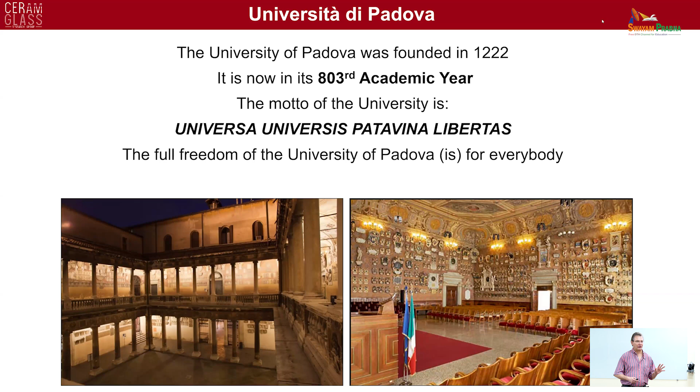If you're interested in history, I can explain further. This is related to the fact that the Venetian Republic was not under the Pope, and therefore it had freedom of research and teaching, which other places didn't have in Italy for a long time.

Galileo was a professor in Padua for 17 years, and actually Sidereus Nuncius, the book he published describing Jupiter's moons, was written in Padua based on the observations he had there.

If you come and visit the university, we still have the chair that was built for him by his students, so that they could see him because he wasn't a very tall guy. The University of Padua is famous for the medical school because the anatomy field started in Padua.

We have a long list of important alumni. If you're a mechanical engineer, you certainly are familiar with cardanic joints. Cardanus was a professor of mathematics at the University of Padua. The list also includes Giacomo Casanova, who graduated in law from the University of Padua.

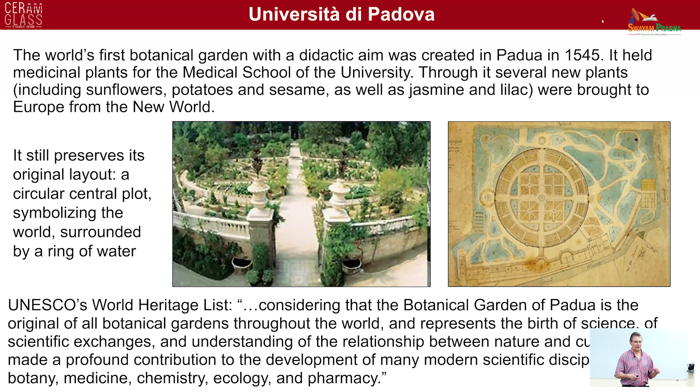We also have the world's first botanical garden, created to teach medicine, or actually medicinal plants, to students, and it is still in the original place. A lot of plants from the New World were introduced into the Western world through the botanical garden in Padua.

We also have the first female laureate in the world. She was a Venetian noble who graduated at the end of the 17th century. After graduation, she was sent to a convent for the rest of her life, but at least she was a doctor, and she kept studying and working.

The university is pretty large. We have about 75,000 students, of which about 13,000 are engineering students. The data are a little bit old, but we don't have a bad ranking in the different listings. My department deals with the fields of aerospace, chemical, electric, energy, mechanical, and materials engineering.

We have, of course, courses at the bachelor's, master's, and PhD level. Currently we have about 150 faculty, about 190 PhD students, and more than 200 postdocs.

So we are very interested in, as I mentioned, student exchange and collaboration between different institutions.

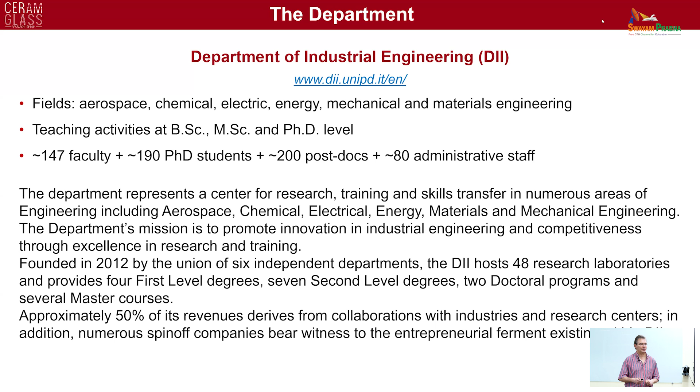Personally, I work mainly on additive manufacturing of ceramics, especially from precursors. I have been working for a long time on polymer-derived ceramics, and I'm working also on geopolymers now. A colleague of mine is working on biomaterials, and we are also interested in materials for the environment.

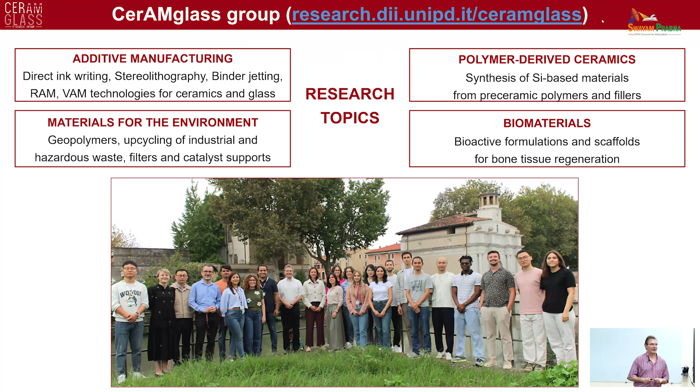This is my group with a couple of colleagues, and some funding agencies from institutions and companies. So I think I can move to the lecture.

In this cycle of classes, I will be discussing additive manufacturing of ceramics. I don't know what kind of background you have in additive manufacturing. The first lecture has the aim of telling you why and when it would make sense, in my opinion, to use additive manufacturing.

The main message is that you do not necessarily need to use additive manufacturing if that's not favorable in terms of cost, speed of process, or geometry of the component. So I don't want to put you off the topic, but I'm simply trying to encourage people to use additive manufacturing where it could have the most impact.

So this first talk is quite general. I will be talking about why it would make sense and when it makes sense to use additive manufacturing, specifically for ceramics.

You're certainly familiar with the fact that you have three basic principles for the shaping of materials. You have formative shaping, which is applied a lot to metals and polymers, but can be applied also to ceramics. Subtractive shaping is also a very good way of transforming a part into a component with specific shapes.

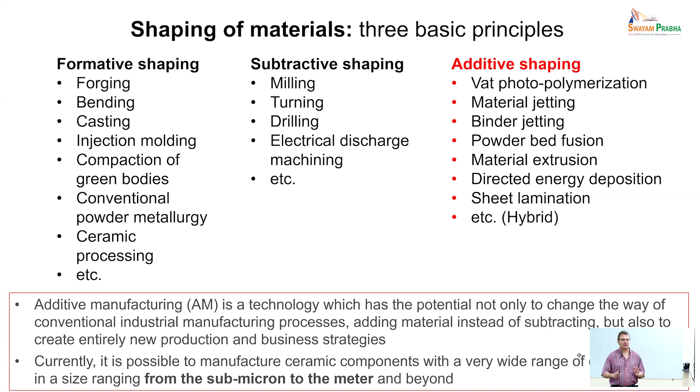Currently it is possible to generate ceramic parts with a wide range of compositions, starting with sizes from a few hundreds of nanometers to the meter and beyond. Of course, there are still a lot of limitations in terms of compositions, precision, and all these things that are related to the specific technologies that people are using.

One point I would like to make is that at the beginning, people were referring to additive manufacturing as rapid prototyping. This shows that the idea behind it was not that of producing components for use or testing, but it was rather simply a rapid way of shaping specific parts and showing the potential that they would have starting from the shape.

These days, there's been the transition from rapid prototyping to actual additive manufacturing, where you use this type of technology for making parts that you can use.

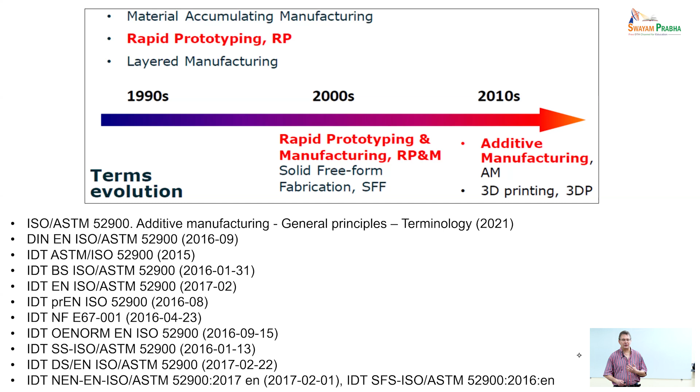They are called binder jetting, material extrusion, directed energy deposition, material jetting, powder bed fusion, sheet lamination, and vat photopolymerization. They each use different approaches. They have limitations and characteristics, and I will try to discuss some of them specifically in relation to ceramic materials.

Let me just mention that these technologies are not enough. People are still trying to develop new approaches, and one possibility is to use what is called hybrid additive manufacturing. So you combine different technologies because, as I will hope to demonstrate, each technology has strengths but also drawbacks. By combining different technologies, people hope to overcome some of the limitations that come with each specific technology.

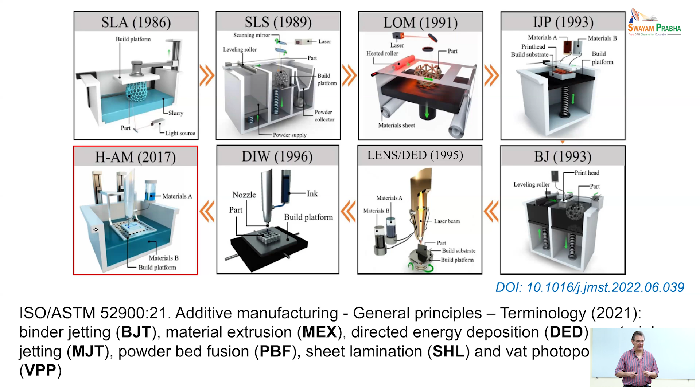So that would be the holy grail for ceramic additive manufacturing, if you can do that. But those technologies have a lot of problems, and the parts you can generate do not yet possess the properties required for application. So people mainly use technologies where you shape the component and then transform it into a consolidated, sintered bulk ceramic part.

This is a bit trivial because you're certainly familiar with the fact that additive manufacturing is basically creating objects layer by layer, and what you need to do is inscribe the layer and consolidate the material specifically where you want it in space on your XY plane. This leads to certain surface features that can be detrimental or not, depending on the application.

For ceramics, remember that surface flaws are a killer for mechanical properties. So ideally, for ceramic manufacturing, you would like a smooth surface. But there are applications, for instance catalyst support or areas where you want to increase the geometric surface area of your part, where having surface features might be useful.

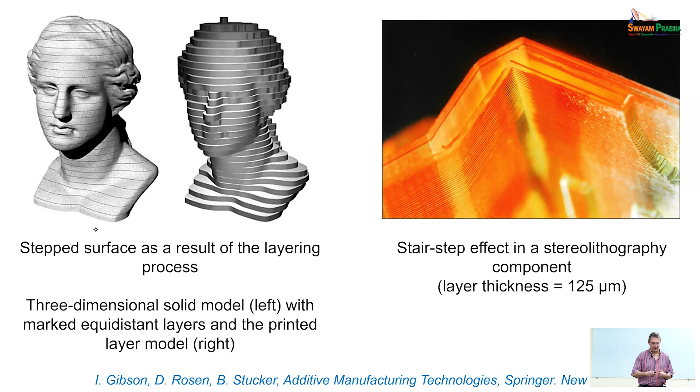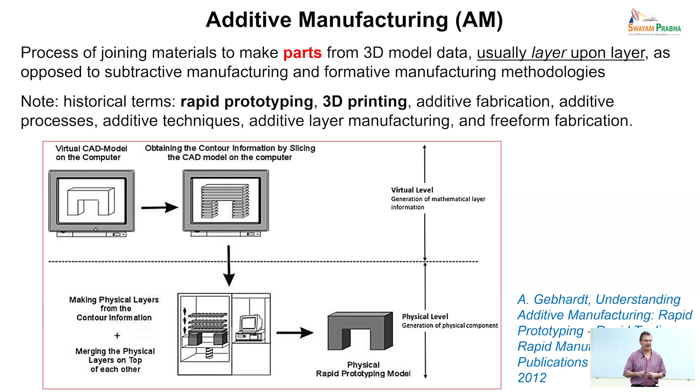Let me mention that what is true for this type of additive manufacturing is actually not true for a new type called volumetric additive manufacturing, or VAM. VAM builds a part within the volume of a liquid, and therefore the part is not built using a layer-by-layer strategy. This leads, for instance, to smooth surfaces, which is quite nice to have.

So there are quite a list of advantages for additive manufacturing technologies, you can see them there. You don't need tools and molds, which are expensive, especially for ceramics because they are hard materials. You have a fast time from design to product, and for small series production they're cost efficient. You can make a wide range of highly customized products. And we shouldn't forget that with additive manufacturing, you can obtain geometries that would not only be difficult and expensive to generate using conventional manufacturing, but components you would not be able to manufacture using traditional approaches at all.

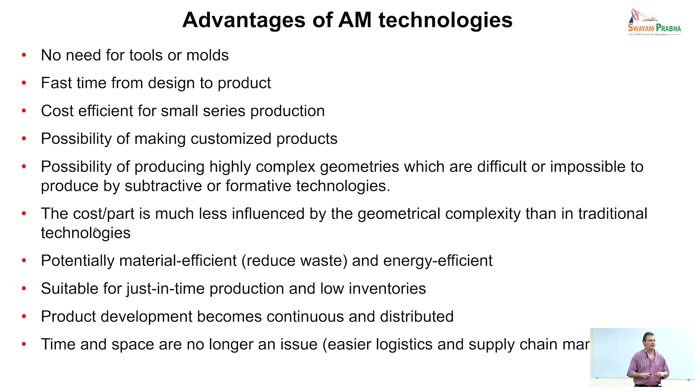Also, another significant advantage is that the cost per part is not influenced so much by the complexity of the geometry, and that's certainly a strong advantage with respect to traditional technologies. You can see other advantages there.

These are classical images you can find, there's a reference there, that show for traditional manufacturing you typically have a decrease of cost per part with increasing the number of parts manufactured. This is related to the fact that tooling is expensive. It means that with additive manufacturing, you don't have this economy of scale effect, which makes it possible to generate a limited number of parts, but highly bespoke, highly architected for specific applications or customers. This shows the strength of additive manufacturing, because you get the possibility of individualization for free.

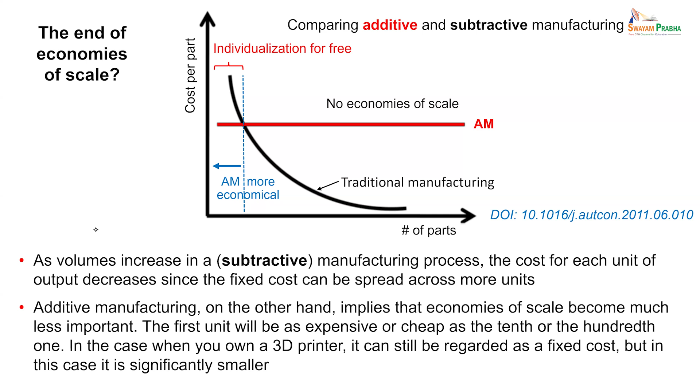Another chart people show is that cost per part with traditional manufacturing increases rather steeply with increasing customization, complexity, and the number of variations needed in the part. While with additive manufacturing, printing a simple design or a more complex design is not an issue. So above a certain threshold, additive manufacturing provides a strong advantage, because you obtain complexity for free.

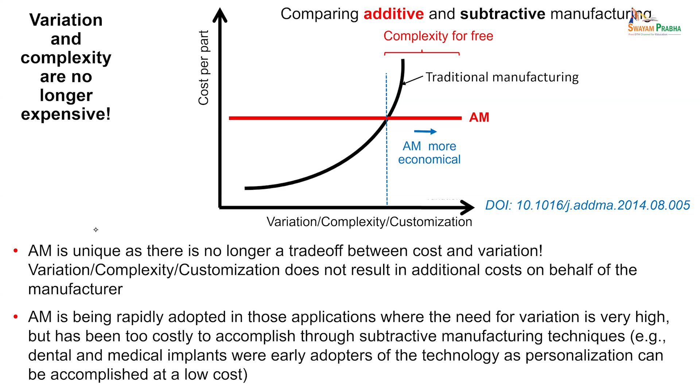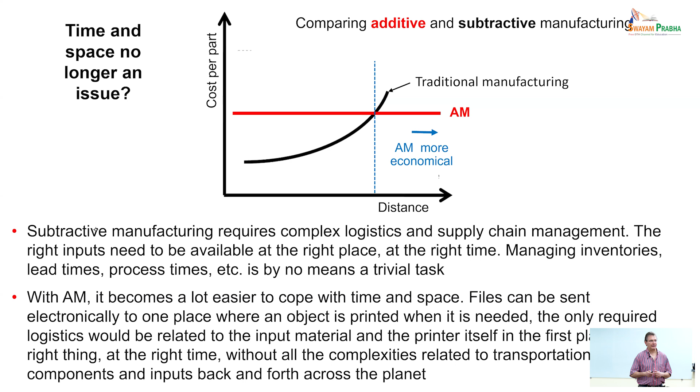Another point I'd like to make is about the cost per part with respect to the distance from the manufacturing site to where the part is used. With traditional manufacturing, cost increases with distance because of shipping. But with additive manufacturing, you could distribute the designs to different localized factories. This way, additive manufacturing becomes more economical when you have to send parts far away from a single specialized factory.

I will not talk a lot about applications of additively manufactured ceramics. I will be talking more about shaping, about fabrication rather than applications. But I just want to give you a couple of examples that show the advantages of additive manufacturing.

This is a catalyst carrier designed by Fraunhofer IKTS in Germany in collaboration with Lithoz, an additive manufacturing provider of printers in Austria. You can see that by computation, and now with artificial intelligence, you can drive the design of the part towards using the architecture of the part as a way of controlling and optimizing its properties. In this heat exchanger, there's a completely new design compared to traditional catalyst carriers, with improved efficiency because you have in situ turbulent flow, shorter reaction path, faster reaction time, and higher conversion.

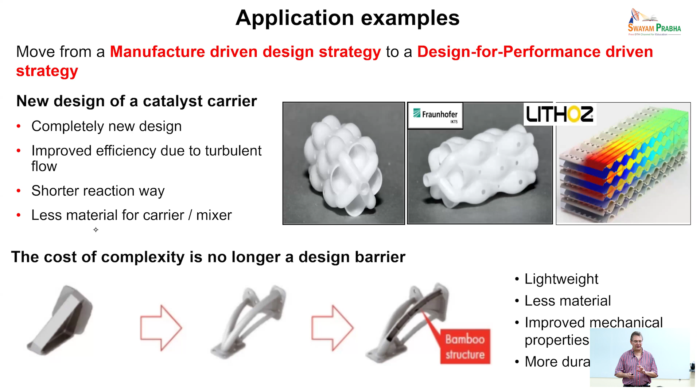You can see another example showing that the cost of complexity when using additive manufacturing is no longer a design barrier. You can see going from a traditional component to a more optimized component where you have less material, better mechanical properties, and a more lightweight part. There is tremendous effort going on in the field of additive manufacturing for topological optimization—computational modeling and optimization of shapes for specific applications.

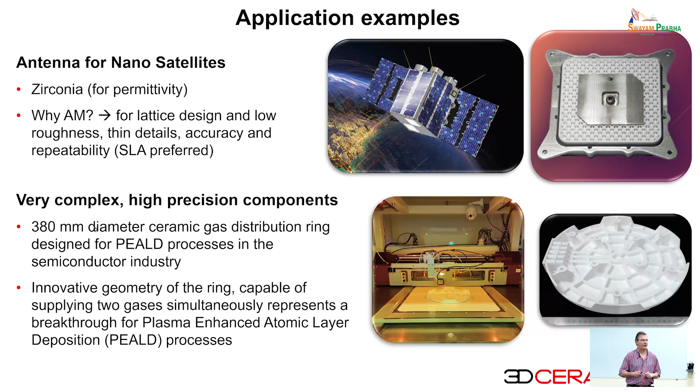So I'm certainly an advocate for additive manufacturing, in particular for ceramics, but we need to be aware that there are also disadvantages. As a student, you tend to follow trends because they're exciting, they're novel, and you want to make an impact. But at the same time, you need to be aware that not everything is paved in gold.

The disadvantages of additive manufacturing technologies are, for instance, that printers are expensive. Of course, you can have cheap printers, but then you get cheap parts, or cheap looking and behaving parts. From the industrial point of view rather than research point of view, the technology does not provide an easy means for scalable production because there are limitations to the technology. If you want to make a lot of parts, you need to use a lot of printers—you cannot simply increase the size of the vat, for instance.

So you need to operate in series. There are also certain limitations in terms of the size of parts you can make using additive manufacturing. The production rate per machine is limited by a range of factors, and also the type of material itself poses some issues in terms of what you can do using a specific technology.

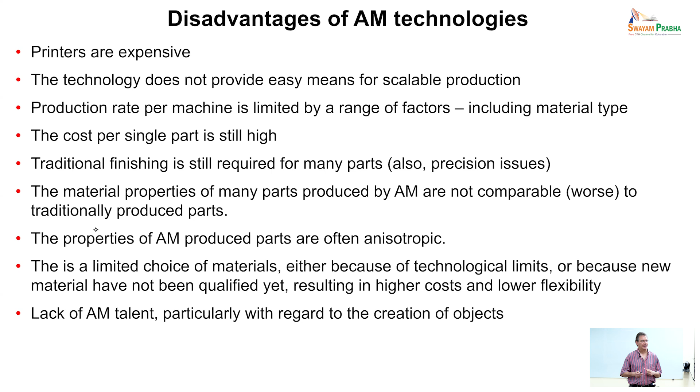Additive manufacturing is not taught a lot at universities yet. Certainly it is from the computational point of view, but from the manufacturing point of view, it's less so.

I already mentioned that you have 7 different categories for additive manufacturing. People working in additive manufacturing in general would call direct additive manufacturing a technology that gives you not just a shape, but a material that is ready to use, already consolidated. They would call indirect additive manufacturing all the technologies that require further thermal processing to obtain your final part. So from that point of view, almost all technologies used for additive manufacturing of ceramics are indirect additive manufacturing technologies.

But we can use the same terminology with a different meaning applied specifically to additive manufacturing of ceramics. We can say that direct additive manufacturing is an approach where you deposit the material only in the position that gives you the desired shape for the final object. These include direct ink writing, inkjet printing, or fused deposition modeling.

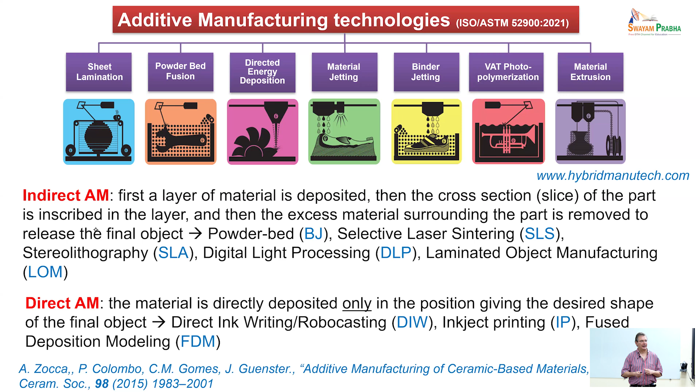While indirect additive manufacturing is an approach where you deposit a layer of your material, you inscribe a shape of that layer using different approaches, and then you remove the excess powder. This means, for instance, that you cannot make an enclosed space or enclosed cell, because you would not be able to extract the unbound powder from that area. These technologies include binder jetting, selective laser sintering, stereolithography, DLP, and laminated object manufacturing.

I'm not going into the details for each technology because there are certainly books available and a lot of sources for you. But I would just want to quickly present the different technologies and highlight some of their working principles and issues that you might have specifically with ceramic material when using these for ceramic materials.

So VAT photopolymerization technologies - here I'm not listing all of them, but you have SLA, which is let's say the original one. You use a laser to consolidate your material layer by layer, and the laser typically comes from the top, and you generate the part, then you lower the part, the liquid fills the space that you've left, and you inscribe your layer again, and so forth.

Another approach is to do the same - you're basically cross-linking layer by layer using a photopolymer, and you lift or lower your body by the thickness that you want for generating the layer. Then you irradiate using a different approach that is based on mirrors and a different source for the light.

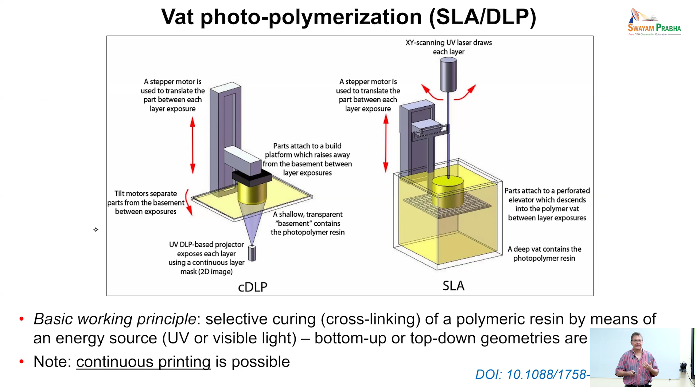This means that every time you shift the layer, you shift the part, and the gap needs to be filled by your feedstock. If the feedstock does not flow because it contains a lot of particles, then you have issues in terms of the homogeneity of that next layer you're generating.

So of course, what you could do is reduce the number of ceramic particles in your feedstock. But this means your part will have a lot of polymeric binder that needs to be decomposed. This leads to issues in terms of gas release, cracking, and also shrinkage, because the less solid ceramic particles you have in your system, the higher the shrinkage of the part, with issues in shape stability, and also it's an issue of cost.

So people use highly loaded suspensions, meaning more than 40 volumetric percent. In terms of weight percent, you can go up to 80 weight percent ceramic particle loading into your feedstock.

When you have such highly non-flowable slurries, you need specific printers that spread the layer using a mechanical blade, like a doctor's blade. This is the best approach for generating a continuous, homogeneous, flat layer of new feedstock that then needs to be photo-cross-linked.

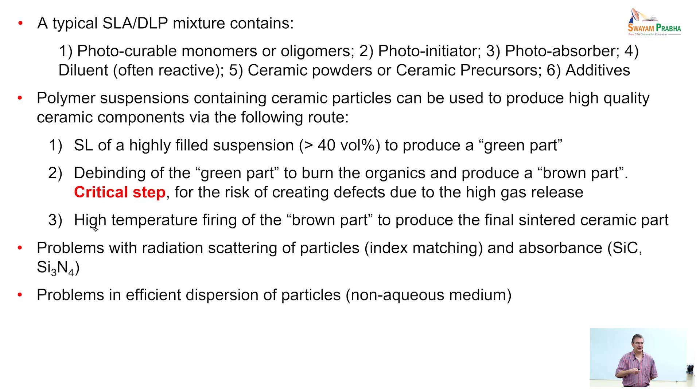Having a homogeneous and stable slurry matters because with conventional DLP or SLA, it takes hours to print a part, so you need a slurry that is stable for a long time. This is certainly a problem for using these types of technologies with ceramics.

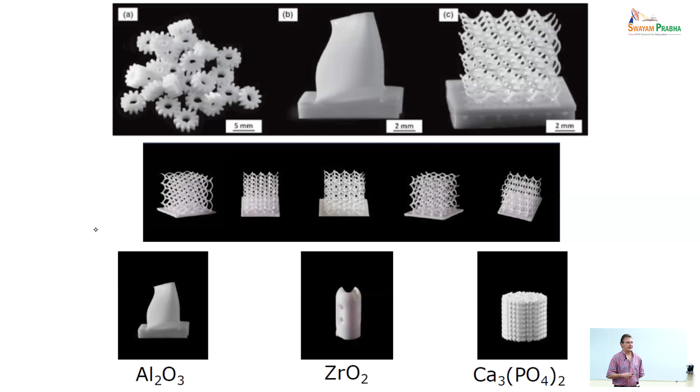But you can see here that people are actually able to use these technologies quite well. Here are different parts - they don't necessarily have any applications, the ones in the middle, but they show the capability of the technology. These are parts made of alumina, zirconia, and calcium phosphate, which is a bioceramic.

Another technology that has been used quite a lot for ceramic feedstocks is binder jetting. Binder jetting has this specific working principle: you have a way of depositing your powder layer by layer, and after depositing a layer of powder, a printing head deposits a bonding agent that binds selectively the powders just deposited. Once you finish inscribing that layer, the part lowers, you coat again with a new layer of fresh powder, and repeat the process, giving a different shape.

In this case, you can use inkjet printer heads, which have a resolution of a few hundred dpi, dots per inch, so the quality of the surface can be quite good for the printed object. What you are jetting is basically a diluted polymeric binder that can go through the small nozzles of your printer head.

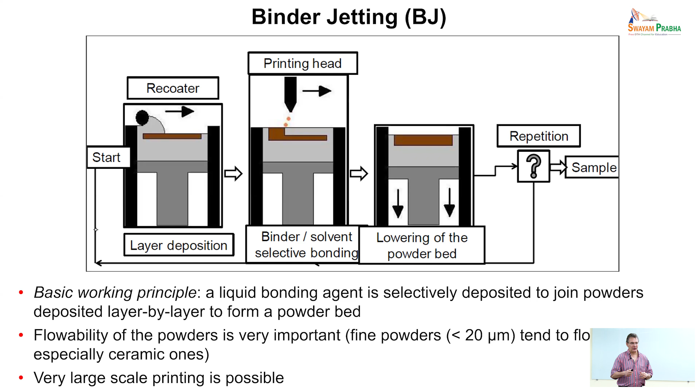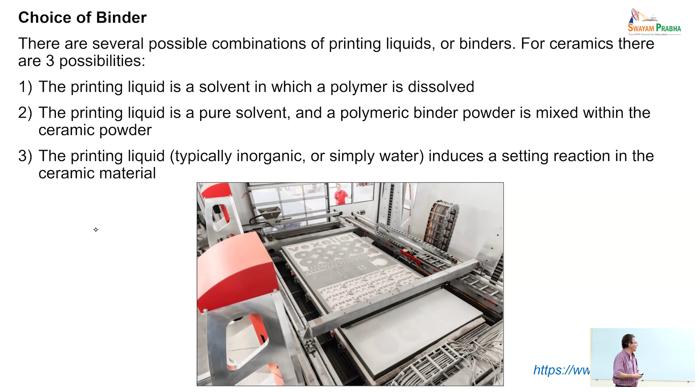You can either use the liquid jetted from the nozzle as a solvent-containing binder, or just a solvent, putting binder particles together with the ceramic particles—the solvent will locally dissolve the binder particles, joining the ceramic particles together. People have been using this technology for making some casting cores.

I mentioned that you have residual porosity. One possibility is to fill it using molten silicon, typically combined with pre-infiltration with a carbon source, making siliconized silicon carbide, a good material for high temperature applications. Or you can exploit the residual porosity within the solid—for instance, when making bioceramic parts, porosity within the solid helps with connection to tissues, vascularization, and transport of fluids within the solid.

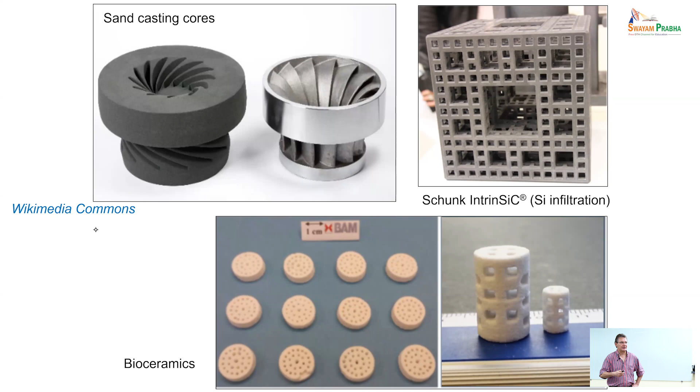So for certain applications, binder jetting is good. Material jetting, or inkjet printing—I was going to say there are not many examples of this technology. Actually, there is an Israeli company that does that, and now also an Italian company that does this for ceramics.

Here, the idea is simple. Instead of printing simply a binder, you're printing a binder containing slurry that also contains ceramic particles. This certainly makes sense. It is a technology that on a 2D scale is used every day for decorating tiles, for instance, because you have jetting nanoparticles for generating colors, but you can do this in 3D.

The problem is that conventional inkjet heads require nanoparticles, otherwise they wouldn't flow through their nozzles. So you either need to develop your own feedstocks, like this Israeli company, or like this Italian company has done, redesign the jetting, the printing head and the nozzles through which you're jetting your ceramic particles. Otherwise, conventional approaches do not work.

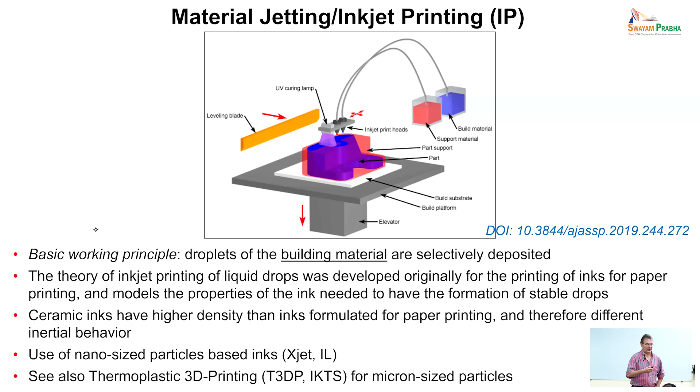The other technologies I described, SLS, SLA, DLP, are not that suitable for making multi-material components. We just acquired a 2-vat DLP printer. Basically, your sample is built on a support, and you have 2 vats with 2 different materials. The part is built on one side, then you clean, then you build on the other side with a different material. You go back and forth, with issues in terms of cleaning and lack of sharp interfaces and things like that.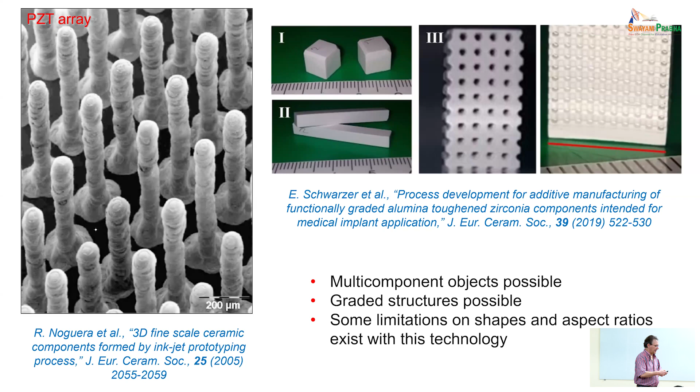But with jetting, it's much easier to have different feedstocks and generate different parts. It's easy to make graded structures, although you have some limitations in terms of aspect ratio.

Powder bed fusion, or powder bed sintering, is a very good technology for polymers or for metals, because you can in situ melt or sinter particles, and in the end obtain a fully dense body. For polymers, this works rather well. For metals, you have issues in terms of the microstructure, but you can certainly get nice parts with it.

You can also use an electron beam for melting rather than a laser. This technology, of course, is based again on depositing flowable powders. In this case, since you are melting in situ, you can reach full density, despite needing a flowable powder. For ceramics specifically, this technology would be very nice because it would allow you to obtain an already sintered part after shaping. There are some difficulties, because it is very difficult to obtain parts that do not contain significant amounts of defects.

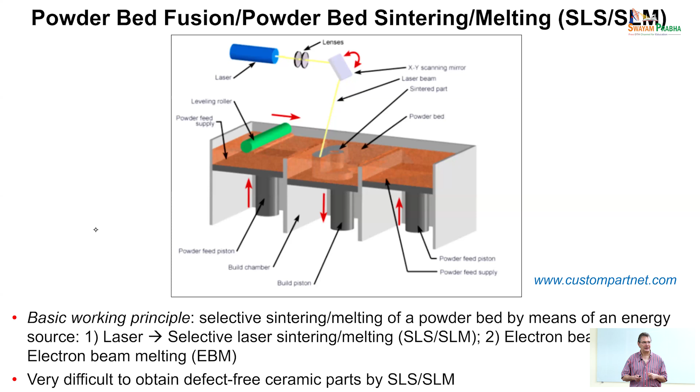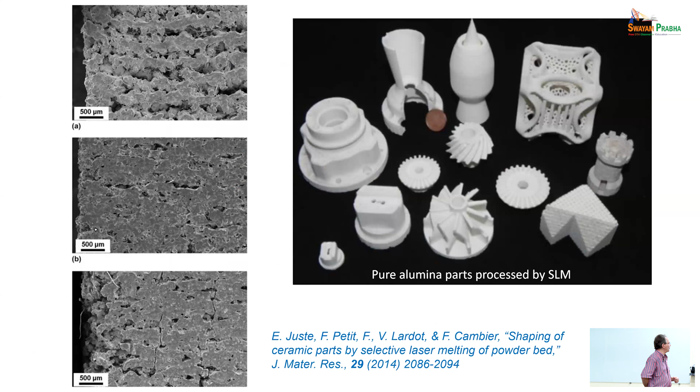These are old data, people are doing better things now. You can see some nice capabilities in terms of shaping, but if you then look at the microstructure, you can see a lot of localized voids, and especially cracking. This is due to the fact that you have very fast, very high temperatures, fast heating, and more importantly, fast localized cooling. For ceramics, this leads to cracking because not all ceramics have very good thermal shock resistance.

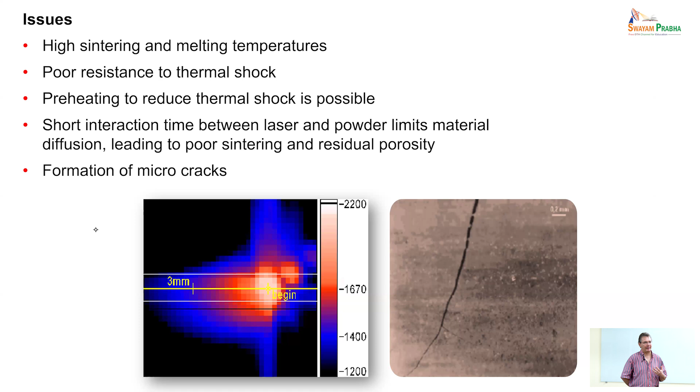So I'm not familiar with any large-scale application of this technology for ceramics, while for the other technologies I've described, there are a lot of examples. Directed energy deposition works well with metals.

You have a flux of powders through a nozzle, and then you use either a laser beam or an electron beam to locally melt, typically, or simply sinter, but typically melt your powders. For metals, you can do that in an inert atmosphere in order to avoid oxidation.

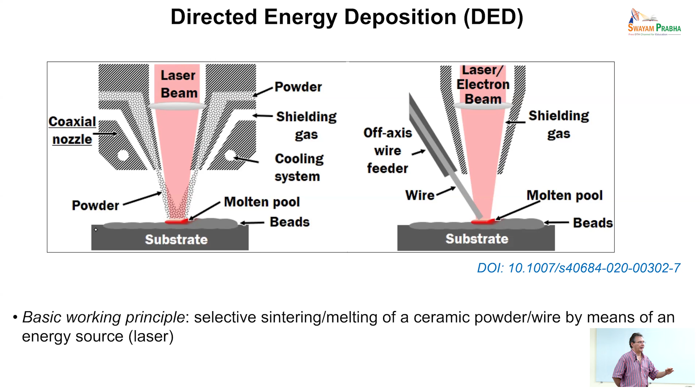A variation of the powder approach is to use a wire, a filament of your metal, and you melt it locally. This is a very nice approach for metal particles. For ceramics, you still have the issue of very fast cooling, which leads to cracking. And for ceramic materials, you typically don't have a wire based on a ceramic material where you can do that. There are also certainly problems in controlling the microstructure.

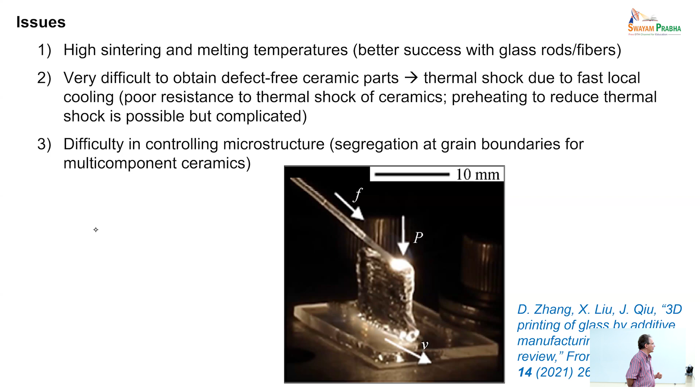There are some rather successful examples of doing this using silica fibers or silica rods. Silica has a coefficient of thermal expansion of about 0.5 x 10^-6 per degree centigrade, so it is highly thermal shock resistant. That's why you can locally melt it. The melting temperature of silica is about 1700 degrees, but the glass transition temperature is about 1200 degrees. So you simply need to go to, let's say, 1400 degrees, and then you can have localized melting of your glass. You do not have thermal shock because of the almost zero coefficient of thermal expansion. So you can see here some successful examples for glass.

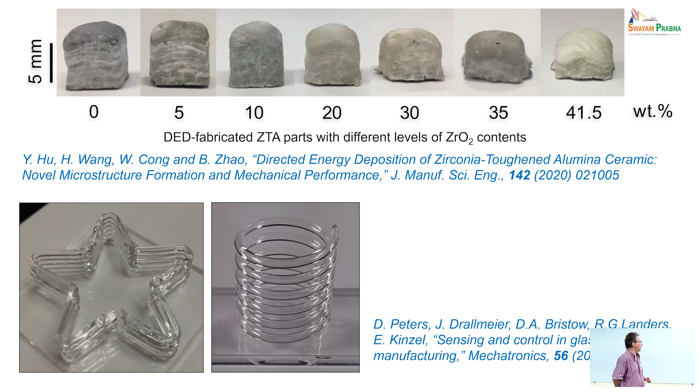People have tried this with ceramics, and you can see that they can succeed, but you can see what is the quality of the parts, without even discussing what are the characteristics of the microstructure of the material.

Another approach, the first one that was developed for polymers, is FDM, trademarked by Stratasys as fused deposition modeling. A more appropriate way of calling it would be FFF, fused filament fabrication.

For a polymer, you have a polymeric filament that you melt inside a nozzle, and the nozzle deposits the material, which cools down quickly. This is favorable because the molten polymer can retain the shape given by the nozzle. You can use nozzles down to 200 microns in size, leading to very smooth surfaces. It's still a layer by layer process with stair-stepping effects, but at that nozzle size, surface features are much less evident, so you can get nicely looking parts for polymers.

Before discussing direct ink writing, you can do this with ceramics, but you need a ceramic or ceramic-containing filament. You might think, well, people make polymeric filaments containing anything, so why not ceramics? You can do that, but you cannot go above a certain volume of ceramics, otherwise the filament becomes too brittle and breaks inside the printing head, which is a nightmare.

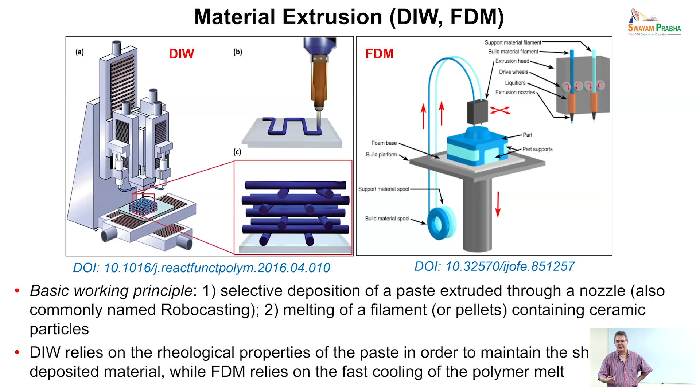You typically would like to have this type of technology for generating parts that have complex shapes, or especially open parts containing open porosity. In this case, you need to control the rheology of the part quite accurately, but I'm not going to discuss that in this lecture, but in other lectures. This is also used a lot for ceramic materials, direct writing, because it has the advantage that you do not need to generate a filament or pellets using this.

So the optimization of the ink rheology means that you need a specific type of viscosity or rheological behavior. You need what is called a Herschel-Bulkley fluid, which is simply a pseudoplastic type of rheology behavior with yield stress. So Newtonian flow, shear stress has a linear dependence with the shear rate. Dilatant: if you increase the shear rate, you increase the viscosity, and pseudoplastic is the opposite.

So an example of a dilatant fluid is ketchup. So if you want to extract ketchup from your bottle, you should not shake it, because if you shake it, the viscosity increases and then it doesn't flow. So you need to be patient and apply and let it flow.

For direct writing, you need something like toothpaste. So if you have toothpaste, you open the tube and you do not want that to flow spontaneously. So the fluid has a yield stress. You need to apply a stress above a certain threshold. Then you apply the stress and the viscosity decreases, and then it starts flowing. But once the fluid comes out of the nozzle, the viscosity increases again because the stress is decreased. And therefore, if you have the bristles of your toothbrush, the toothpaste sits on top, doesn't flow a lot into your bristles.

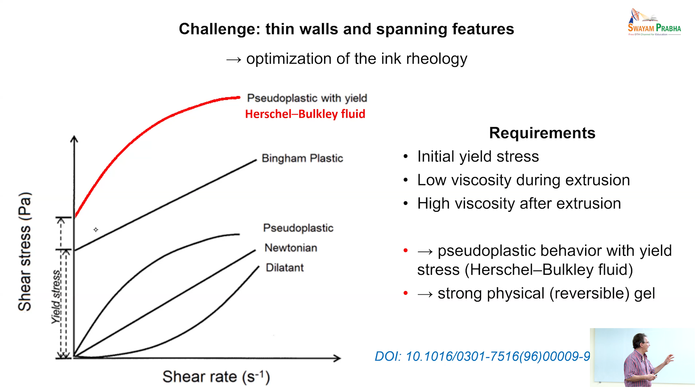So for your ceramic feedstock, you need to engineer that type of properties or that type of rheology. You need to have a yield stress and you need to have a pseudoplastic behavior. And there are different ways in which you can do that.

Of course, you need additives, and you can use fast evaporation of a solvent, but in this case, you might generate cracking. So you have to be careful.

For FFF, let me just remind you, you do not have this issue. I mean, you still have the issue that you have a liquid layer that needs to be consolidated after being extruded. But in that case, you have the temperature that does it for you. As soon as the temperature cools down, is reduced, the viscosity of the polymer increases a lot. Here, you do not have that, you have flow without temperature. So you need different ways of consolidating.

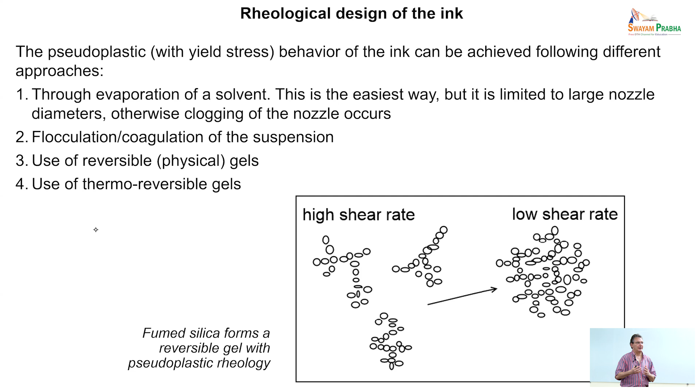And you can flocculate, coagulate the suspension. You can use reversible physical gels. For instance, if you add a little bit of fumed silica, that generates a reversible gel. At low shear rate, you have an interconnected network. At high shear rate, you break down the network, and this is reversible. Or you can use thermoreversible gels.

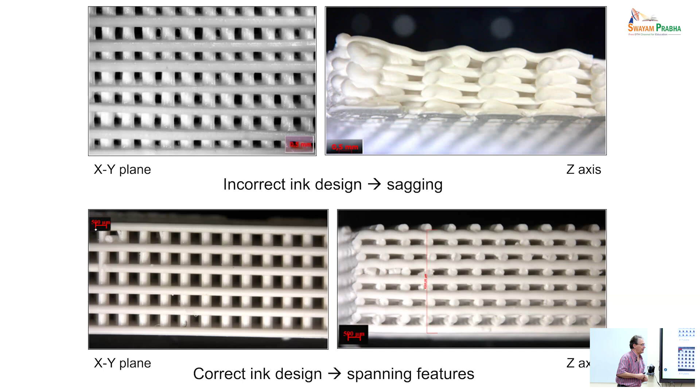The filaments are kind of expensive, but I guess because they lead the market, they can afford to do that. It's about 300 to 400 euros per half a kilo of filament. So, yeah, it's not cheap.

But they're able to make it, and certainly other companies will be able to make it in the future. One feature of this type of ceramic filament is that they are engineered in a nice way, in the sense that you need flexibility, so you need to put in specific types of polymers that allow you to do that.

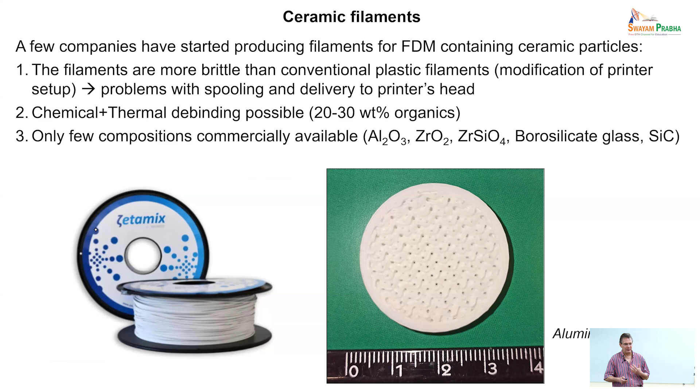One disadvantage of this approach is that specifically for filaments, there are very few compositions commercially available. I wrote borosilicate and zirconium silicate, because you can buy them, but they don't work—at least we haven't been able to make them work.

The last technology I will mention, and then I will stop, is one of the first ones that was invented: LOM, laminated object manufacturing. This is not really a 3D approach, it's more a 2.5D approach. Basically, you have sheets of your material, then you inscribe them, typically using a laser, and then you need to bind the layers together.

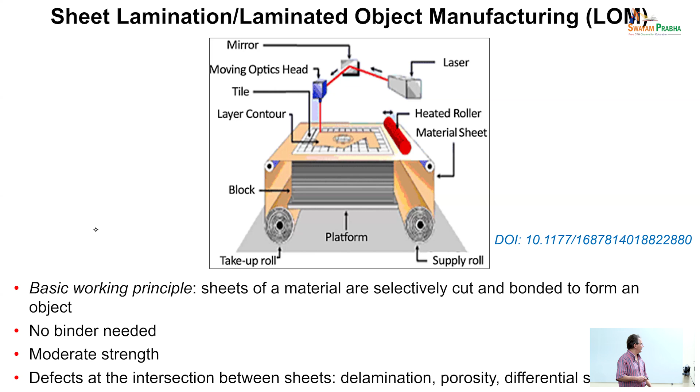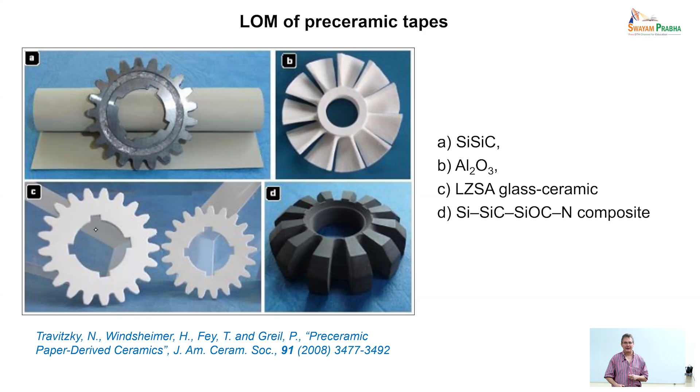So let me just finish here for this part of the lecture, and I'm open to receiving comments and questions.

So how can we improve the dispersion of particles? I'm an engineer, not a chemist, but I think there are people with a strong chemistry background looking at ways of coating the particles so they can be dispersed, like you would do in a water-based slurry, but you need to use different chemicals, different mechanisms for stabilizing the particles. There are a few papers in the literature that discuss that—yeah, because the typical dispersants don't work well.

Then, one of the slides you showed said the filament is more brittle—so if the filament is more brittle, how can we fabricate with it, sir? The filament is brittle, but you can still use it. One way is, for instance, to warm it up. If you keep it at 40 Celsius before you start using it, then for a while it is more flexible. This is something we do—the filaments we buy specifically from one company, we've been quite successful in making parts, so they can work.